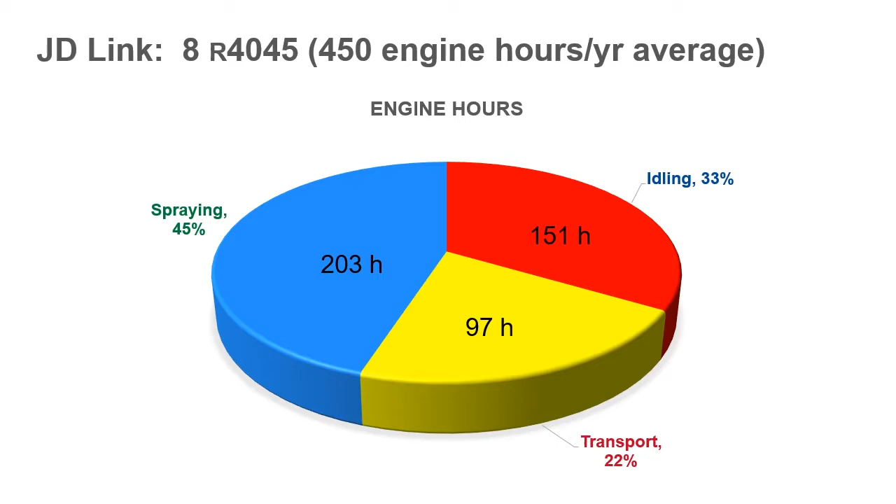This is a loss. So this is not just the ability to get the work done on time. It's also a loss in terms of yield. If you are not able to do that field before the rain, that's yield loss. So it's again a question of timeliness.

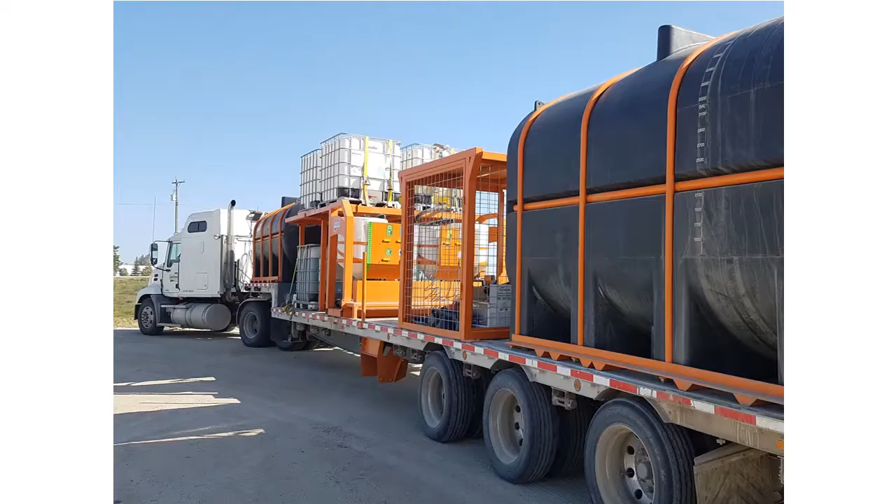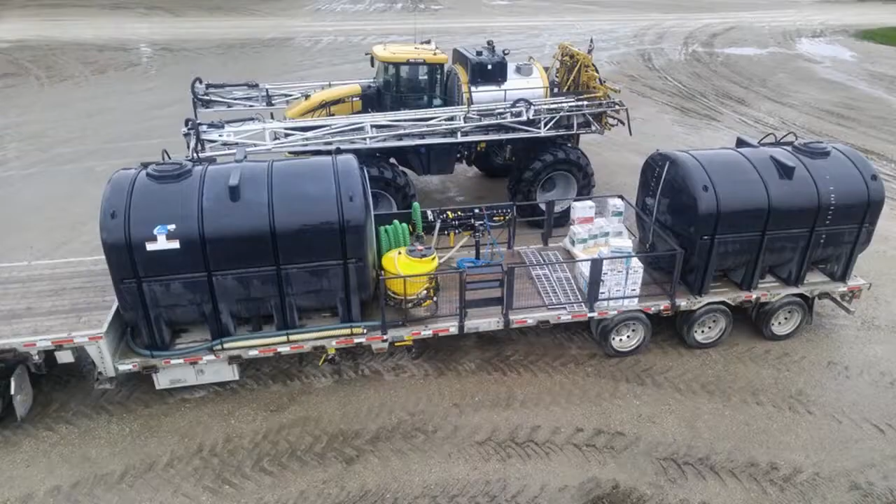So what's really hot and has been for some time is smart tender systems, and we're seeing continued evolution of those. And one new one that came on the scene in southern Manitoba is the Dash system, the fiber Dash. This is a farmer-owned company, designed by farmers and tested on their farm. They've brought some great innovation to it, and each of them has their own approach. Just a few of the things that we're looking for in a good tender system is, of course, capacity. Some people have a hot mix capacity as well, and I'm not sure if this one does, but we are looking for these kinds of things.

The tanks should be black so that they don't get algal growth. A 3-inch pump is essential. There's even some people moving to bigger pumps. Certainly filling these tanks, I've seen 5-inch pumps. These are 1,000-gallon-a-minute pumps. And why? Because filling 5,000 gallons of water takes maybe an hour or two, right? It could take a long time. So you are basically minimizing that downtime.

Hose reel, the hoses get heavy if you can't suck them empty or blow them out. An inductor: basically, most of my customers have gone away from product pumps to inductors because of the speed.

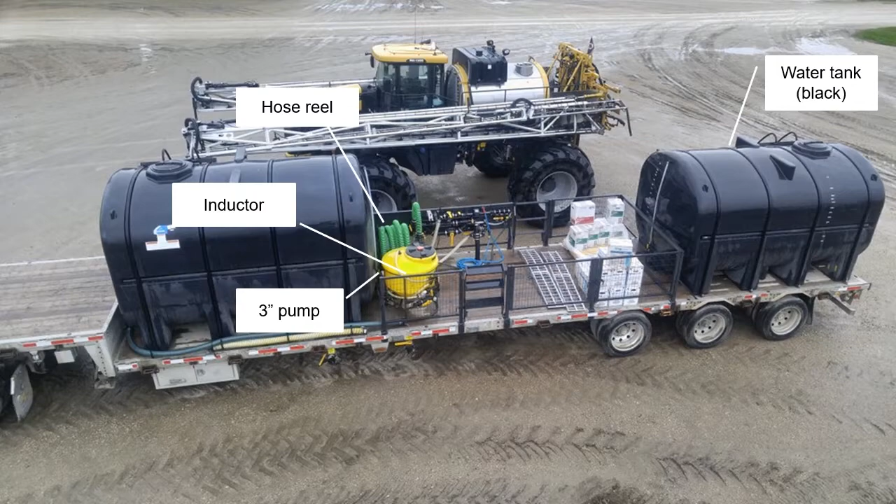Now, product pumps are catching back up. We're seeing some pneumatic pumps that are doing 20, 30 gallons a minute. That's important, and I think that'll help. But if you're sucking from a tote on a cold day, you can't afford to wait 25 minutes for that product to get into your tank. So inductors solve that problem.

We're seeing manifolds, so drawing from different totes, doing your tank mix is nice just with a toggle of a switch. Those are the basic things we see. And this one, we see the cage. So you put your empties in there, they won't blow away, all kinds of things. You've got some ramps here for the quad, all kinds of cool stuff.

I've seen some that are doing a B train on the end here. So they're actually able to unhitch their inductor setup, or perhaps even come back with a tote from the rear. Oftentimes they're side loaded. Sometimes you don't have the room. So coming at it from that other side is a cool thing.

This is Doug Applegate. I just wanted to give him a shout out. So Doug and I talk frequently. He has a system called the MixMate. His company's called Praxidin. So he's a thinker. He's innovative. He's got some very thoughtful flow meters, and he's even got a load cell on his inductor here. So, automatic record keeping. So there's continued evolution here.

What we're trying to achieve is a safe mix that doesn't gum up in the tank, complete dissolution, and also you want to be able to do it in less than 10 minutes, if at all possible. So a hot mix might only take 4 minutes to pump over, and that's what we're trying to achieve. When you're filling every 25 minutes, in some cases, it depends on the size of the tank and so on, that is a big deal. So your mixing time.

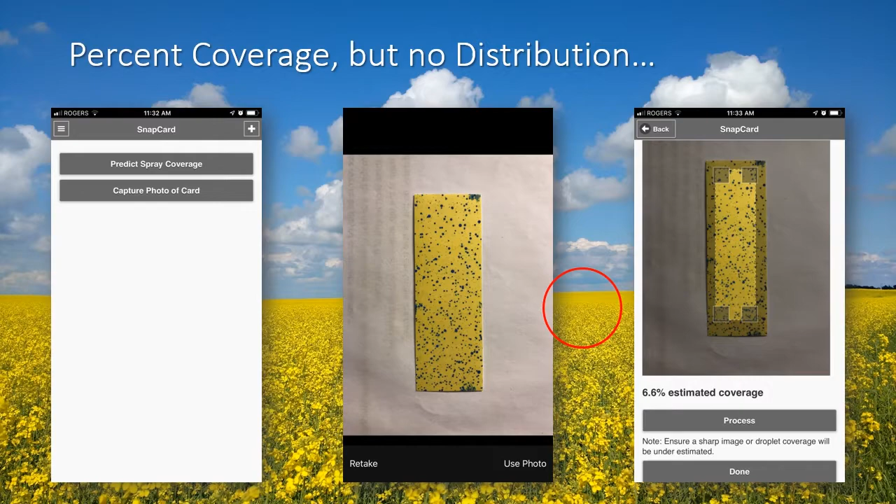You get these apps now. This app that we use is called SnapCard. It's from Australia. Basically, what you're doing is you're taking a picture of the exposed water-sensitive paper. On the right here, you got these handles you can drag to the region of interest, and it tells you at the bottom right away. It tells you coverage. It doesn't tell you droplet size, but it gives you a hard number, and you're integrating that with your own visual observations and your experience.

Another one that gives you more numbers, if you're more into the research side of it and you want some more information, is something called DropScope. We got this one from Brazil. It plugs into a USB port of a laptop. Since we bought it, they've come up with a Bluetooth version, so all you need is a smartphone. But it's a very high-res scanner, so it actually is designed to fit these water-sensitive papers directly into the scanner, and it gives you terrific output.

So if you're a numbers nerd like I am, you get distributions of diameters and volume and quantity. You get all kinds of hard numbers in terms of number of drops, the variability. It does some volume median diameter work, and so on and so forth. It writes reports for you. It's a very, very cool piece of hardware and software.

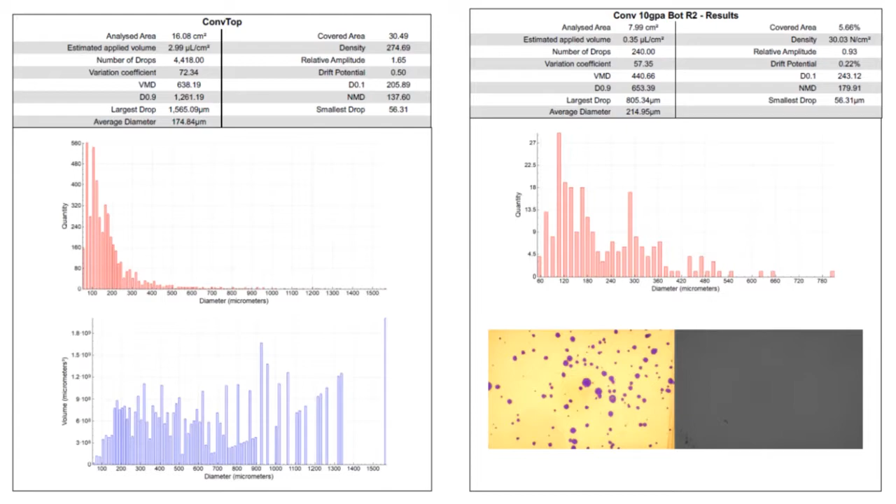So if you're repping a company and you're doing some low drift work and you want to just document where the spray goes in the canopy, these two tools are my recommendation for making that powerful. And then you can actually do statistics on it. And rather than saying, which one do you think is better? You can actually say, well, this one's 25% better.

They now have the fourth generation. We'll show a picture of it in a second. Basically, what this is, it's a sensor that finds a green plant that does photosynthesis on a non-green background on bare soil. So it's a pre-seed burn-off, post-harvest kind of a thing. And basically, it's able to see weeds as small as these little fellas here, this little redroot pigweed.

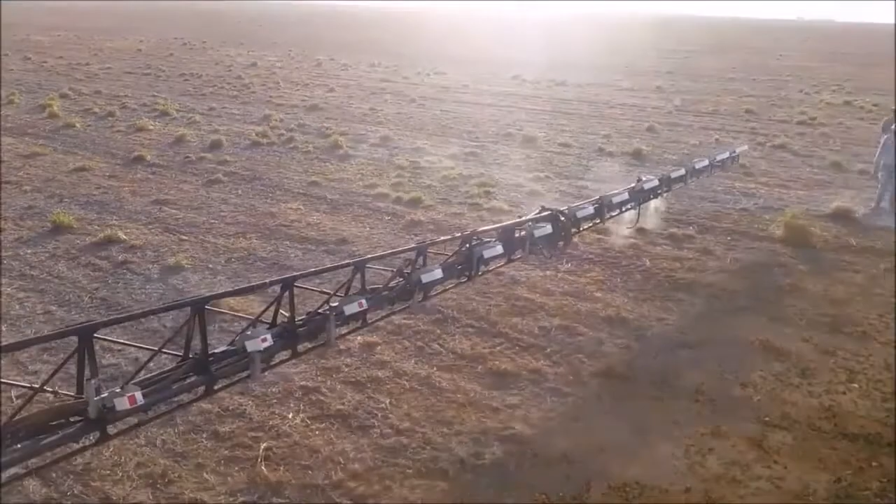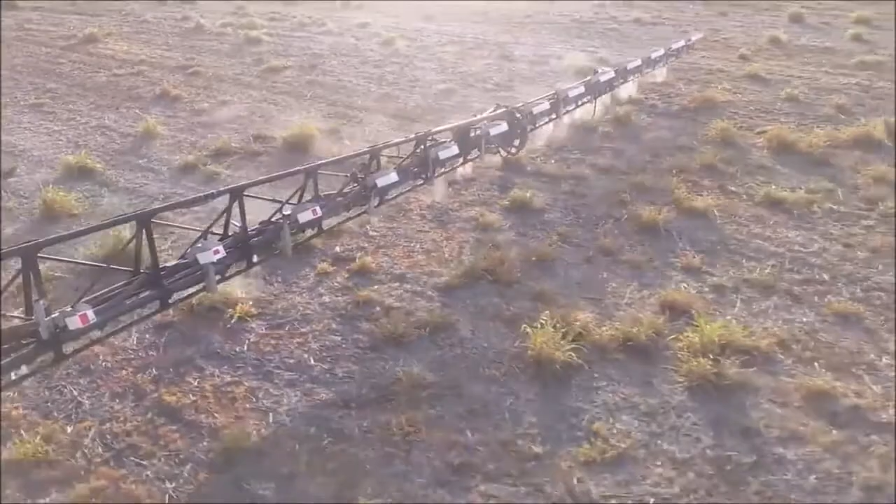And we just use paper to see, did the nozzle go on? Did that thing get sprayed? And the answer is absolutely. Here's a little video. It's a bit of a compilation of a couple of videos I caught on the web that I thought were the best at doing it. This thing will go up to 12 miles an hour. Sometimes people have used it at 15 miles an hour. It senses the plant and basically activates the nozzles that are just there.

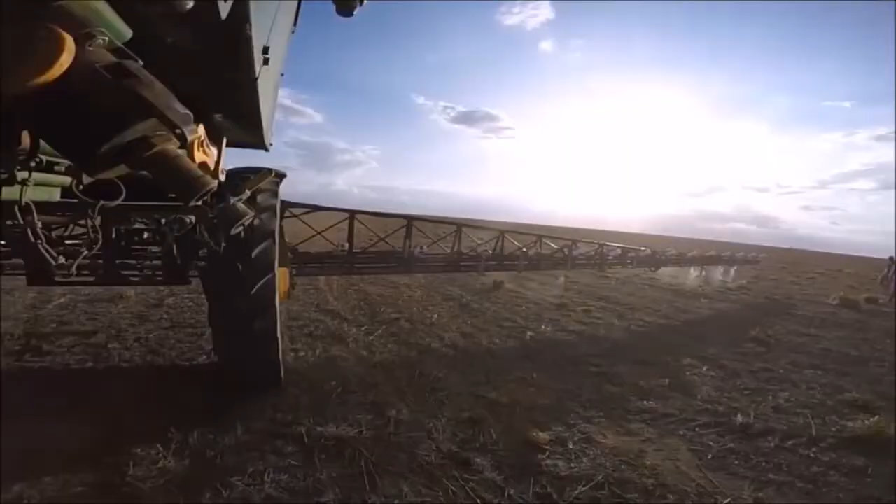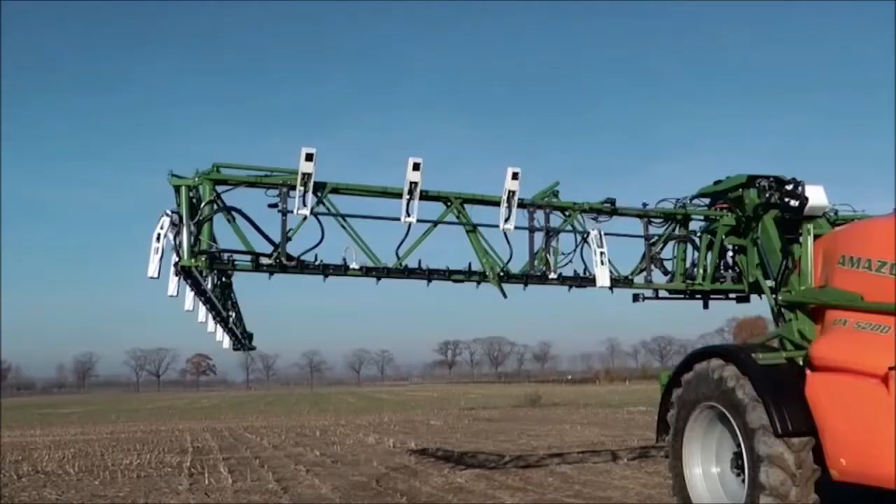The older version had the red light. The new ones have a blue light. It's a lower power consuming light. These sensors are spaced at 1 meter, 40-inch spacing, and they activate 4 nozzles. So it's a high-res thing. The nozzles, as you see, have narrow angles here. They're also pulse width modulated. We talked about that at the last talk. If you weren't there, that means that the flow rate is adjusted for travel speed with a little pulse.

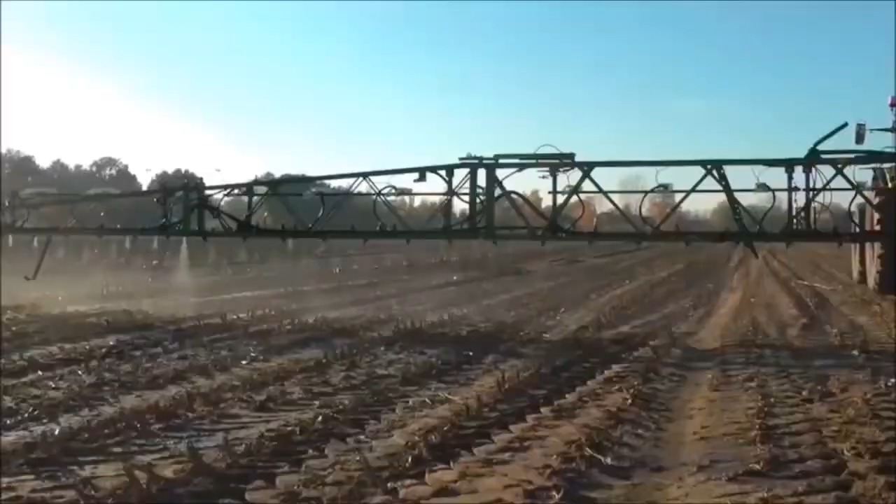So this is the new generation here. This is a picture or video from Europe. They're going pretty slow, but the visual is pretty strong. It only sprays the weeds. What are you getting? A lot of savings. I wanted to show you this one because you can tell every nozzle's on, but you still get the spot spray.

It has something called a background mode, I think it's called dual mode actually, where if your weeds are so small that you're afraid the sensors can't pick them up, and there is a threshold limit, it's maybe a thumb size or something. If they're smaller than that and you need to get them, you can turn the entire boom on, but because it has a pulse width modulated nozzle valve, it will allow you to select the actual rate that you want to apply.

If you got a tank and you got the full quart of product in that per acre, you might think that the tiniest weeds will die with, say, a quarter of that, because they're the smallest weeds. They don't need the full dose. So you can put your whole boom on at quarter label, and then when a bigger weed comes on that won't die with a quarter label, it still is sensed by the sensor, and the whole spray comes on at that nozzle. So in our experience, these things are saving somewhere between 50 and 75% of the spray on a burn-off. And we're going to get back to what that really means.

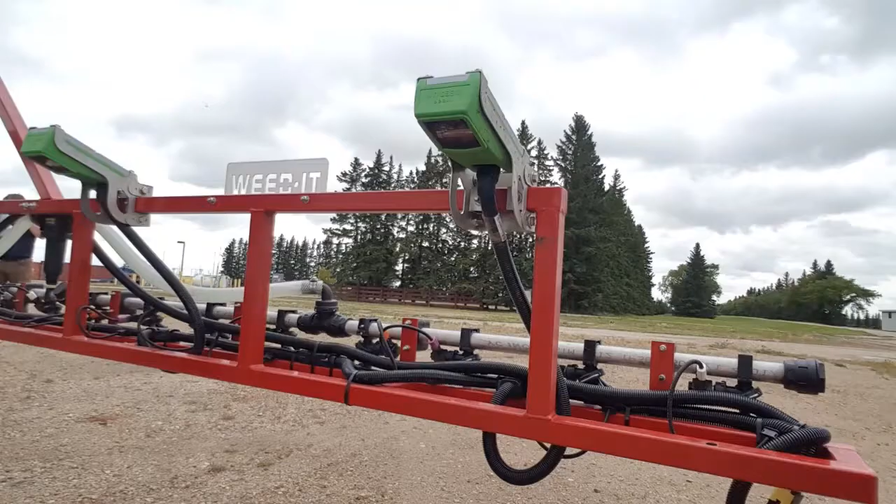The new Quadro has a green housing with a blue light. It's a little bit more compact. It's more power efficient, and they now go on a 10-inch spacing. So you get 4 channels per sensor. So you can go on a 10-inch or a 20-inch boom setup. All you need is the extra nozzle location in there, and that is part of the kit. Nice thing about the Quadro is that it is also, when not sensing, a full-blown pulse width modulated boom. So turn compensation, rate adjustments for travel speed without change of pressure. So a very sweet setup.

I wanted to just maybe take a step back. There are some competitors to this. We do need to mention them. Trimble has a system that you probably have heard of. It's called the GreenSeeker. Well, it started off its life as the WeedSeeker, and it's the same NDVI technology, and they've had a second generation of product. It is slightly less sophisticated than this one.

It's slightly less fast. It doesn't have multiple channels, so you need one sensor for every nozzle. So the really high resolution isn't possible. The high savings aren't possible, those kinds of things. And it's also not pulse width modulated. And the other ones that are around the corner are really just regular camera systems.

And they basically use just an RGB camera, and they say this is a weed because it's green, and this is not a weed because it's not green. They don't have a fancy sensor. So they're able to do that. They might be even using shape recognition to validate the identification. We're going to get into the green on green version of that technology a little bit later on.

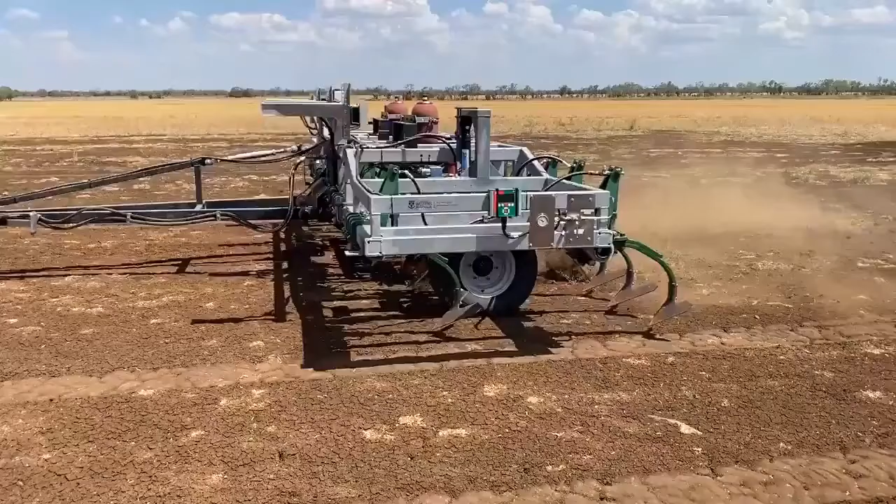What's cool about this whole technology is that it gives rise to new ideas. This is Andrew Guzzomi, and he is a scientist at the University of Western Australia in Australia near Perth. And he's developed this thing called the weed chipper. What he found was the WeedIt sensor and said, I don't know, maybe we can do something with it. What do we got here?

We have a spot cultivator. So the shanks are up. They're spring loaded though. Whenever it sees a weed, it hoes it out. So that's a good tool for us on the arid Great Plains of North America, where we're trying to reduce tillage, but sometimes you still need it. And you can do basically spot tillage. So I love this. I think this is a great little innovation, and who knows what else is coming down that pipe. So that's green on brown sensing.

It's available. It's on the market. The technology is called Weedit. It's available in Montana. It's expensive, but before we get out of it, I just want to make this one comment. We're not going to talk about herbicide resistance except now. Herbicide resistance is an ever-present threat. We've got kochia in Montana. We got other weeds on the way. I hope not soon, but that corner of the world is one of the last places where we don't have Palmer amaranth yet and those kinds of weeds.

In order to delay the onset of resistance, the most powerful herbicidal strategy is multiple effective modes of action. And what that really means is tank mixing, so that you have more than just the group 9 that kills your burn off, but also maybe a group 6 or a group 14 or a group 15, the FMC new farm products that are out there. Other modes of action are specifically designed for that burn off that is effective on the weeds you're trying to control and will kill the resistant biotypes. That is expensive. And saving 75% of your spray makes it affordable.

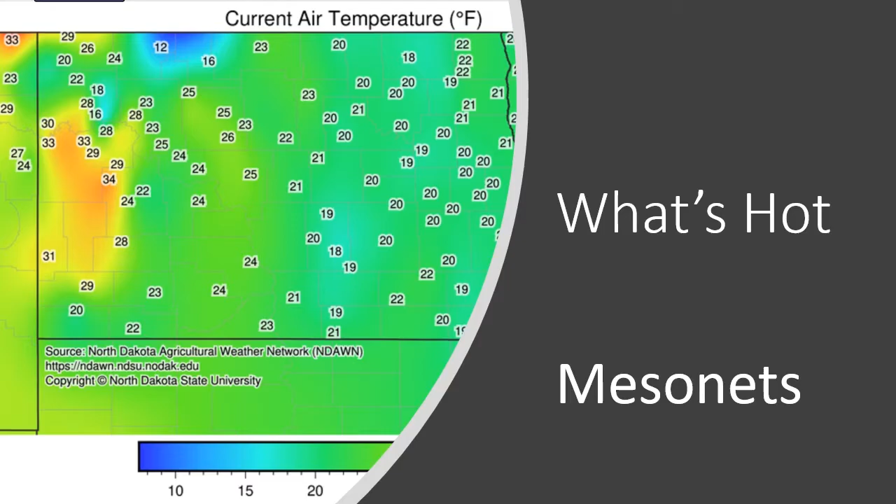And this just gives you better ability to monitor the weather conditions at the locations. It might be a very good tool for scheduling spray systems and so on. This is also available through Farmers Edge. It's available through Climate FieldView, where we're putting these weather stations. And just to give you one example, this one happens to be from Melfort, where we've got some inversion stuff.

I wasn't able to do the screenshot in time here for the NDAWN, but it gives you upper and lower temperature, and it tells you the inversion potential is very low. But if you have a different kind of temperature situation here, much greater difference, a much colder lower temperature, you have a high inversion potential. And that might tell you, I'm going to have to wait an hour before I spray. I'm going to have the sun come out and be sure that we have good conditions for that spray to not go awry.

So fully supportive of these mesonets, very, very powerful tool. What's hot are stable booms. And this is a bit of a bee in my bonnet, as I said an hour ago. I wish that for the $500,000 that a sprayer costs, we can get a boom that is consistently 20 inches above the target over our terrain at our travel speeds. And that would help a lot with uniformity. That would help a lot with drift. It would simply be a very useful innovation.

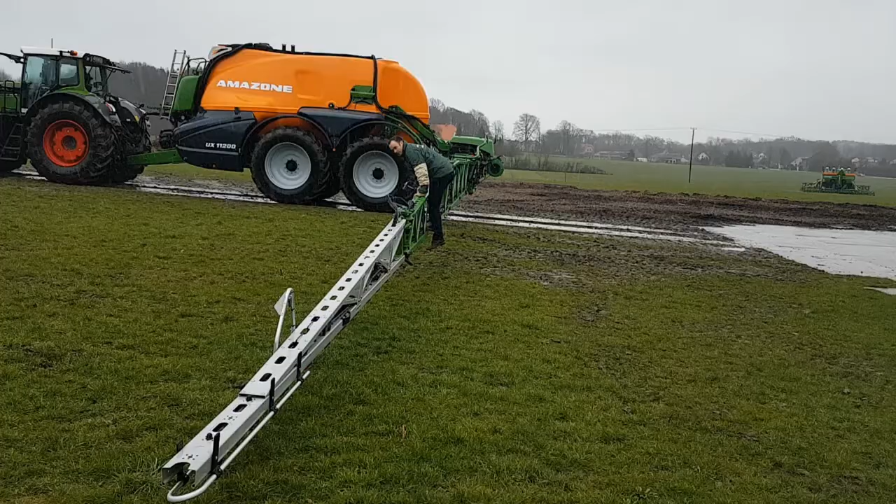A couple of years ago, I went to Germany, and this is the Amazone, and this is Timo here in the middle here, and he just jumped on the boom, on the bumpy track, and the boom said, "I don't care." And they actually drove, and he just held on, and they went over the bumpy track together. And the boom said, "I don't care that there's a guy on the left side. I'm going to be okay with it."

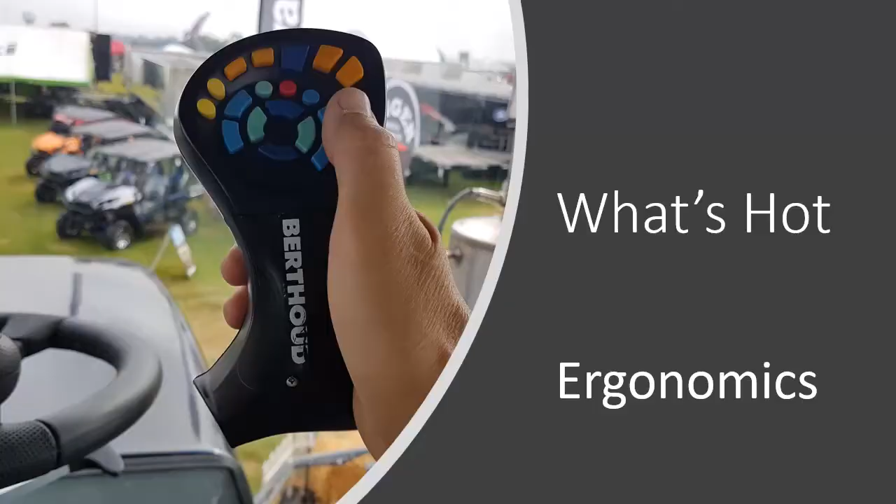But I think what that really means is we're going to continue to see European sprayers like the Agrifac and others coming in and basically taking that niche and saying, we can do this. And with the sprayers being as expensive as they are, any additional feature that you can get, I think will have some value.

Here's another European innovation. This is a joystick. I'm holding it. I ripped it out of the cab. Basically, it becomes a remote control, and you can take it to the boom. You can change your spray pressure. You can turn your boom sections on and off. What a great idea. I mean, I wouldn't own a sprayer without a remote control sectional controller for priming, for flushing, for checking. It's just an essential tool. These guys are building it in, and they're saying, we got you covered. So that's an absolutely essential piece of equipment for me. So this is just one example of a company doing it, but of course the aftermarket ones are for now absolutely indispensable.

What's not hot, I'm just going to maybe give you 2 examples of what I think is not hot. What's not hot is monitors that you have to have a half-hour tutorial on before you can spray. I'm not picking on anyone. Everyone's equally to blame. I sometimes say the golden age of the monitor was when we had toggle switches for power, pump, sectional control, and pressure up and pressure down. And that did the job.

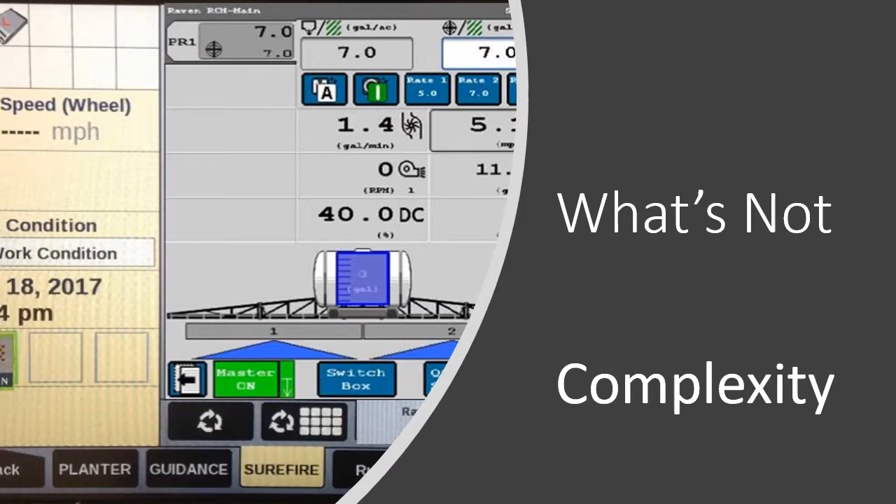They're not yet legal everywhere. They're not legal anywhere in Canada, but some states have allowed them to be legal. The EPA is still on the fence. They have allowed states to give permission to use them. But we really need registrants to come on stream as well and make sure that their products are going to be legally applied by drone, because there is an issue with spray drift. But there's a rapid evolution.

You got high payload. So these are the kinds of drones that you can no longer just buy off the shelf and fly yourself, because they need an advanced drone operator license. In Canada and the US, the 25 kilo weight limit, below that, you can get a basic license. I've got it. It wasn't that hard to get, and you can do whatever you need to do with it. But these heavier drones require advanced license, special flight certificates.

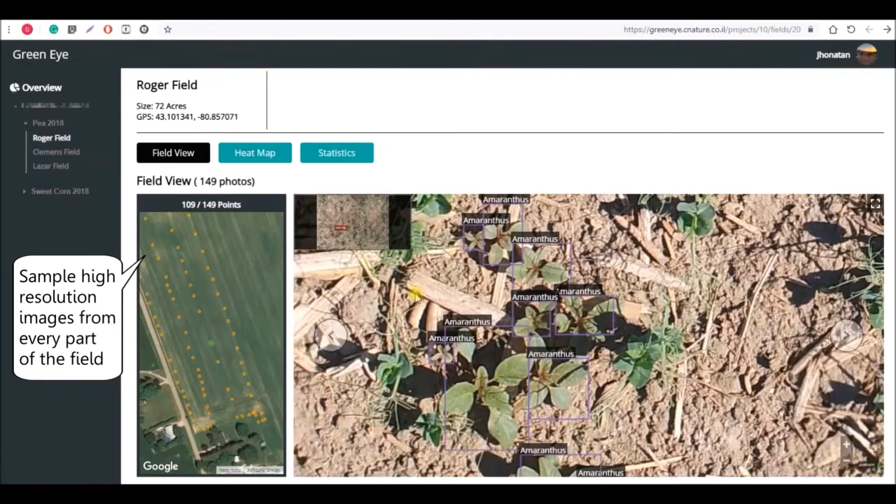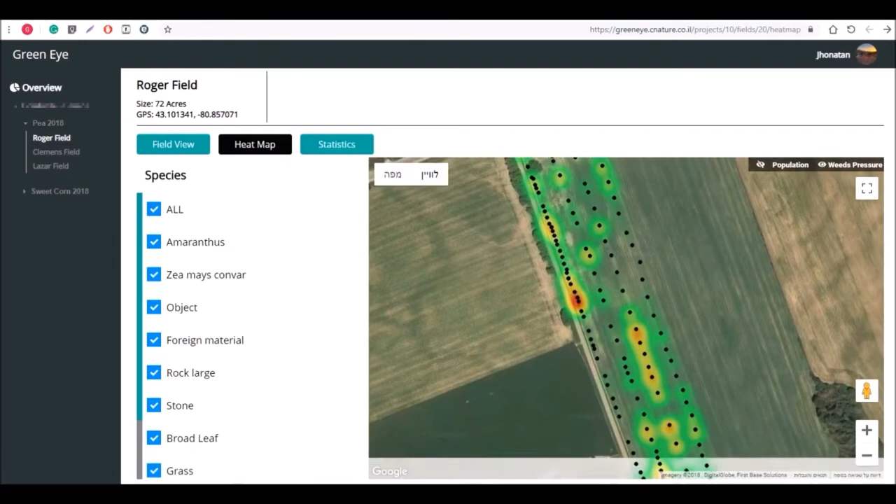This is a company called Green Eye, and they basically fly low drones over the field. They don't cover the whole field because of the resolution needed. So they'll take a picture that gives you sub-millimeter pixels. And then what they can do is they can basically tell you where the species are. So they're saying amaranthus, that's pigweed. They're saying that's the heat map for it.

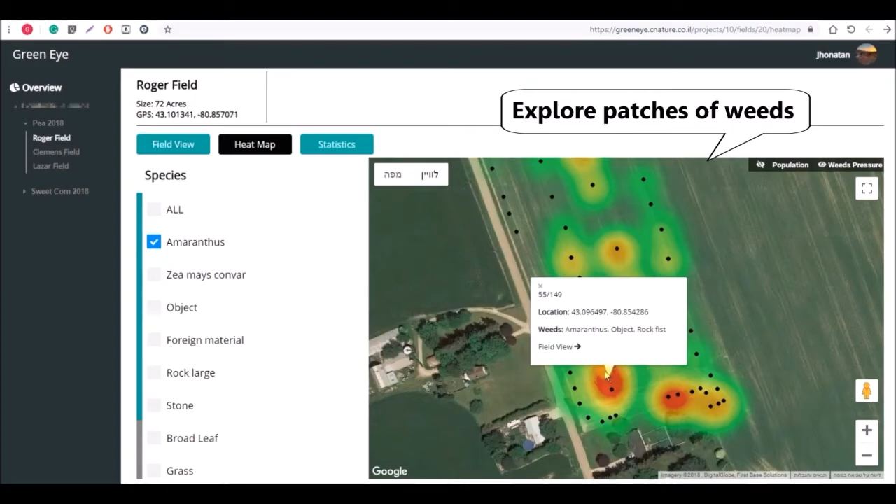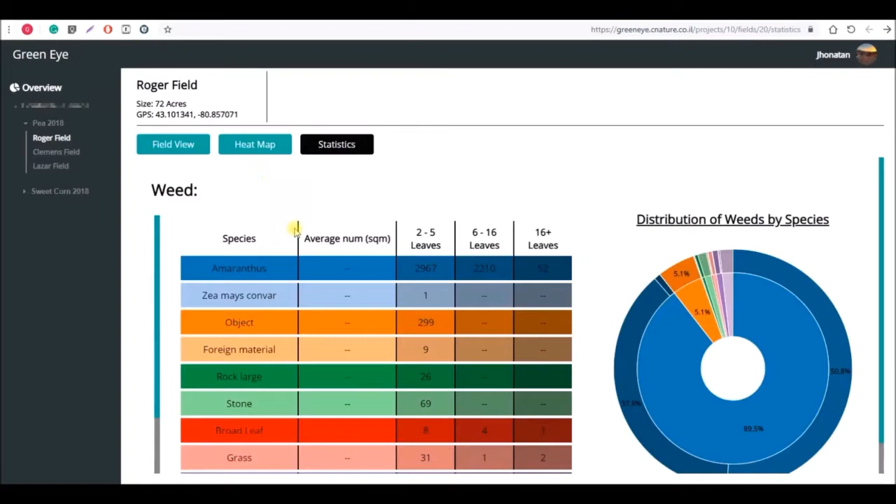And they're going there and they're saying, okay, it's pretty hot here. What do we got? That's the field. Oh yeah, that's what it looks like. And they've identified every plant by species. They even identify rocks. Then what they do is they basically will give you a pie chart, a table. They'll tell you small leaves, large leaves, and they'll give you the distribution.

This is like now you have a map of your field. Where are your weeds and how big are they? Even just for scouting, that's powerful. And maybe monitoring the effectiveness of your herbicide program, taking note of areas where resistance might be emerging because you haven't got effectiveness, and being able to do a ground truthing on those.

So that's Green Eye. A company called Taranis is also doing the same thing. They're still struggling with a high res complete field coverage because they do have to fly low and take essentially a sharp picture.

And that's a challenge. But the artificial intelligence is there. And what they're trying to do is develop these sprayers so that we can get cameras on booms, be able to basically speciate every single plant that's on the field, and then say, all right, we're going to spray this one, but not that one. We are at about an 80% success rate, judging by the companies.

Xarvio is leading the field. A few others are in the game. Carbon Bee and Bilberry are doing it in France and Australia, respectively. Both of those are French companies. And we're starting to see that kind of technology. So the future is bright. Blue River, of course, is one from California. We're initially going to see this roll out in the row crop world. So it's a little bit more of an eastern Great Plains, southern area, not so much in Montana where row crops are a little bit more scarce.

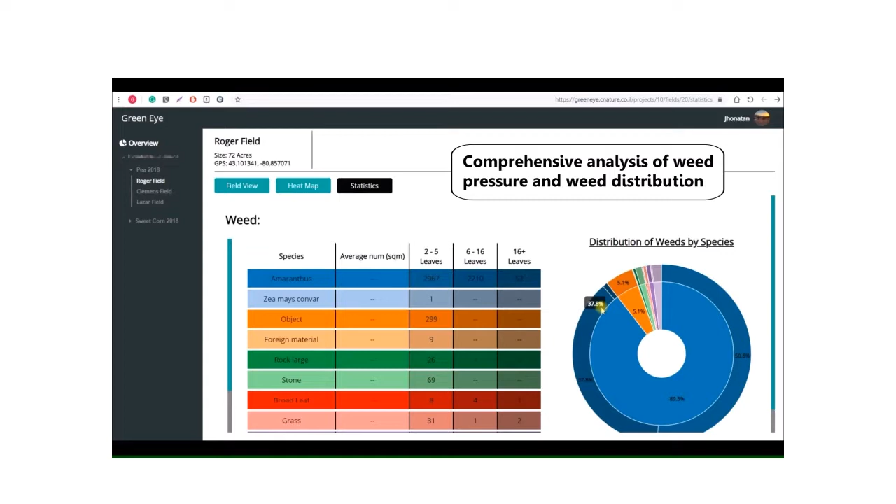Big challenge, but I think their threshold for making this work is about the kind of performance we want from herbicides. We're expecting a 95% success rate with herbicides. Otherwise, we may need to spray again, depending on the weed density. Well, this technology is going to have to be at the same level. Here's just one example of what they're doing, driving with the video camera and saying, yeah, that's live. So they're saying, yeah, we got stuff. This is what it is, and we're going to spray it.

So very, very cool. We're going to change gear now and just talk about a little analysis we did recently, and then we're going to focus on 4 solutions to the problems we're going to find. And that's how we'll finish off. We still got a good 20 minutes or so to go here, but this is the change of pace. What I want to show you now is basically a chart here that talks about where the spray goes.

And I'm going to give you some scenarios that you might not necessarily agree with, but they are a baseline, okay? My first baseline is our field is 160 acres. What that means is this is a unique herbicide on those 160 acres, okay? We're coming in with a cleaned out sprayer, and we're going to clean it when we're done, okay? We're doing 10 gallons. We got a 1,200 gallon tank. We got a 120 foot boom. Where does the spray go? So the total volume we need is 1,600. That's 160 times 10.

But first thing we do is we have to prime the boom. So we have to fill the boom with about 30 to 40 or even more gallons of liquid to get all the hoses full of spray. And while we prime, we spray. And depending on how experienced the operator is and what features the sprayer has, some of that product will spray onto the ground. That's why we prime at the edge of the field, boom hanging over maybe a grassy area or something. And we accept the fact that some gallons are going to hit the ground here. How many? Each individual has their own number.

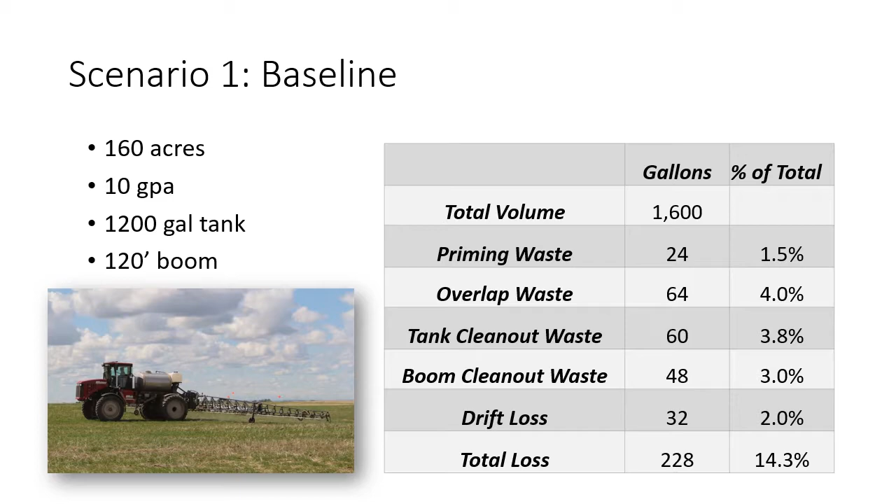This is admittedly a worst case. We're talking about putting 228 gallons onto the ground, basically, or losing it. And we're essentially going to put not 1,600 gallons in that tank, but maybe 1,750. And that's 14% waste. So what can we do here?

Let's do one more scenario. Let's go to the burn off, the 5 gallon. So the numbers are essentially the same, okay? Our priming waste is still the same number of gallons, but because the concentration is much higher, it represents a higher percent. Overlap's the same, but again, tank and boom clean out are much more harmful because they represent a more concentrated solution. And basically, we're losing less gallons, but they're more valuable, and that's a 20% and change loss.

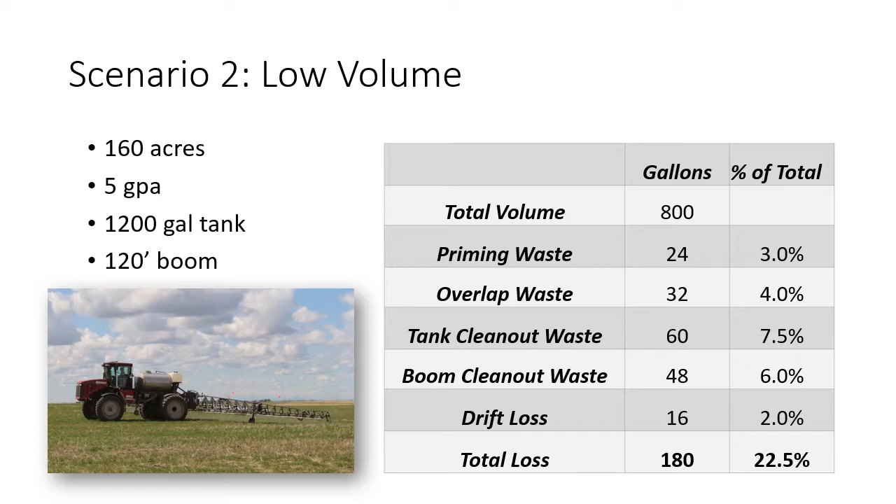Okay. Now let's implement some good technology. We're back to the quarter with 10 gallons, 1,600 gallons. We're going to put a recirculating boom on here that offers no priming waste. We're going to put individual nozzle sectional control on that reduces overlap waste to 1%. We're going to have a better tank. We're going to have more accurate volume measurements and a better sump in that tank.

Boom cleanout waste is still the same because it has to leave the boom and go onto the ground. We're going to put a low drift nozzle on, and our total loss is 92 gallons, only 6% from 15. Okay, so that's what ultimately we'll have to do. Now, I accept that doing it on the quarter is maybe not that accurate.

Let's say you can do 1,000 acres between cleanouts. And let's say you've got the good plumbing that we talked about. So you're doing 10,000 gallons. You're not losing anything to the prime because you've got a recirculating boom. You've got overlap waste of 1%. You've got individual nozzle sections. You've got tank cleanout waste, 12 gallons, so very, very little.

You still have the boom cleanout. That stuff still has to get pushed out. You've got to get rid of it, so that's gone. You've got a low drift nozzle, and you can reduce your total loss to 2.6%. That's from 14.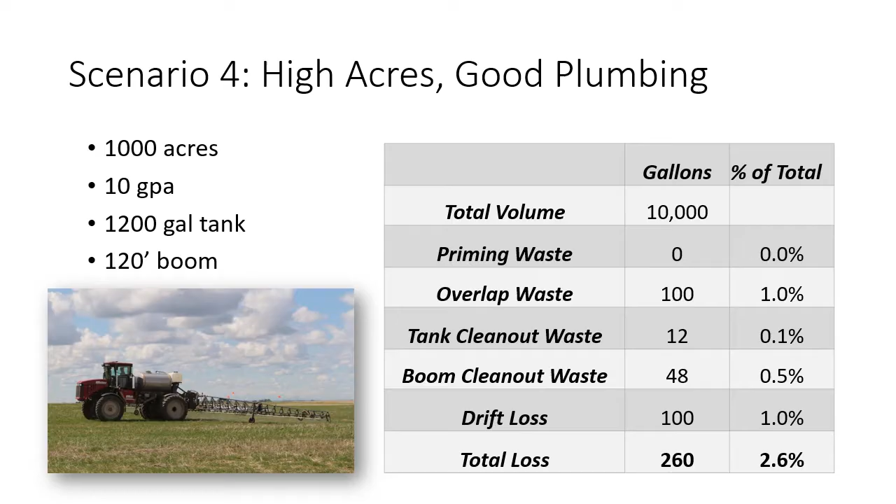So now I've identified a few technologies that I now want to highlight. And I've mentioned the recirculating boom. Okay, what is it? A telltale sign is rather than have a boom end here, the end is open and goes back to the tank. For those of you not familiar with plumbing, basically a conventional sprayer is plumbed the following way: you have a tank and a pump.

The pump pressurizes the liquid. There's some bypass for pressure control, but it pushes it basically to the boom sections. And these sections are maybe 10 foot in length. And these are your sectional controls. So you can individually turn these on or off depending on what you need, but they have boom ends.

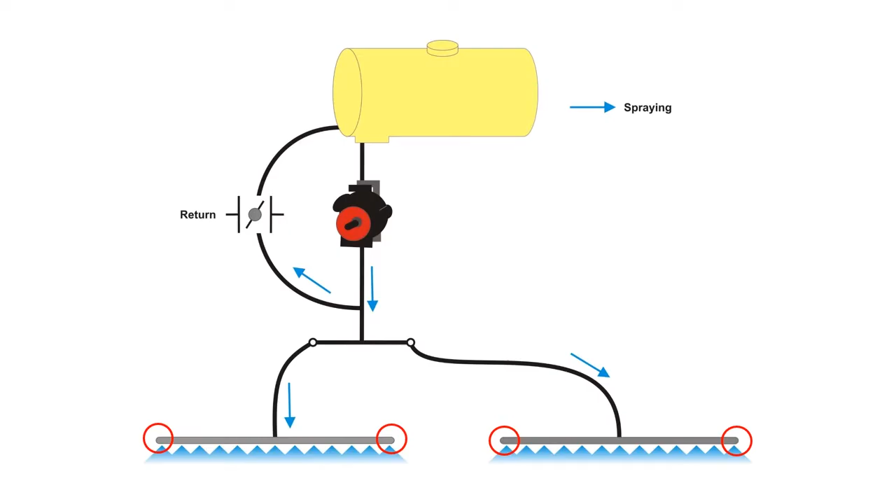So at the end here, you get a very slow migration of material. You might have a dead space here. You might have sedimentation of dry material. You have a problem area. It looks like this. So here's your boom end. This area doesn't get flushed out easily.

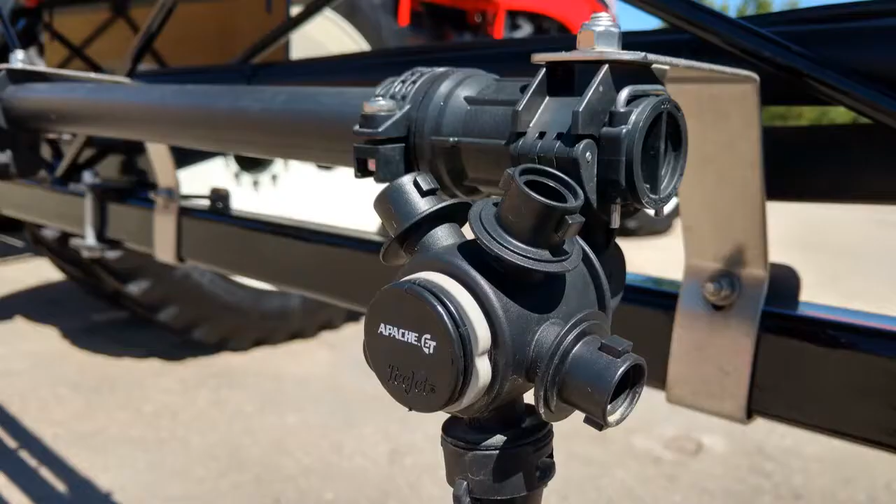So you have to remove this cap, and some people put elbows and banjos on here to do that. It's a little bit of a messy operation. You can get these Hypro Express nozzle body end caps, which have been a great innovation for that.

John Deere also has those. But they've even found with those that they actually do have some settling. So they actually then developed an add-on that lets you drain them temporarily. So even that wasn't done away with. So it's a bit of a pain.

A recirculating boom addresses this issue by having the same tank and pump, but now pushing the liquid not to the middle of the section, but to its end, and then flushing it all the way through and then coming back to the tank. Okay, so that is the principle. And the idea is that you get an entire left and entire right section of boom, and the nozzles, the sectional control, are now with individual shutoff valves, just like we would have on a pulse width modulation system.

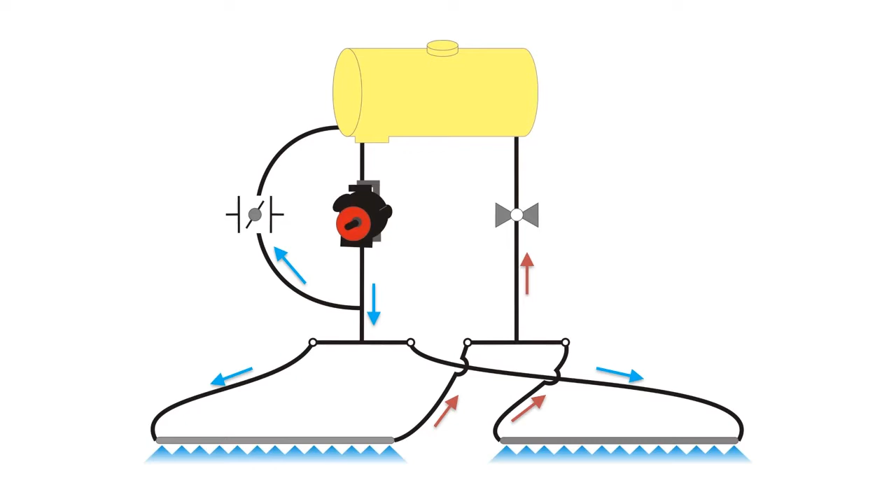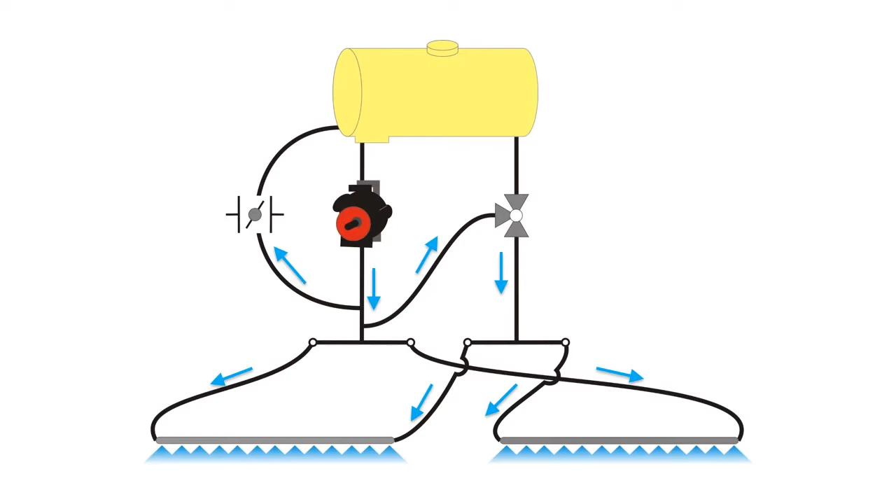Okay, a couple of systems use a three-way valve here, so they can actually choose to push to the end and then bring it back to the tank, or they can open this valve up and push it to the boom both ways. So this makes clean out easier because you can push your pesticide that you have to get rid of onto the field this way, and then only this little section here would go back to the tank, or basically it gets a drain valve and goes on the ground. So that's the principle. Back to pictures.

This is the first commercially available recirculating boom in North America. It's the RoGator Liquid Logic on their C series. Very nicely engineered, quite complex, but it works. Nice sweeps, and it's integrated into their monitor system. So this is an option.

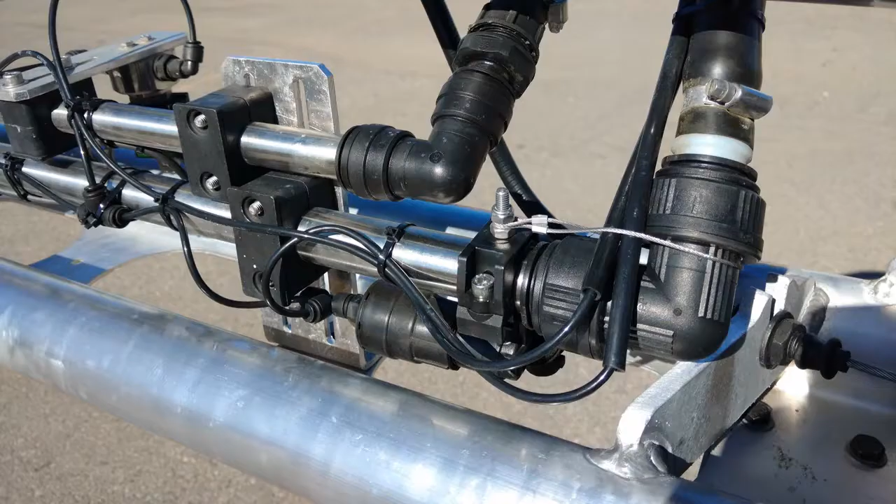This is the Pommier boom. This is the boom that actually brought this technology to North America some 15 years ago. So they will pump the spray using this steel line. This is from the tank, and comes around and goes into the boom, and then goes back towards the tank from here, and then has individual shutoffs. In this case, the shutoffs are air activated, so they're not that expensive.

Aftermarket, this fall, Raven introduced their aftermarket system. It comes with a kit. I'll have to see what it is in US dollars, but let's say around 5,000 is what I've heard. I think it'll be a little bit less than that in some cases.

What they're doing is they're taking individual plumbed sections with their individual sectional valves, and they're actually just stringing them together. They're just saying, we're going to push the liquid to the outside, going to come in here, and then we're going to go to the middle, to the middle, to the middle. This is the center rack here, we're going to push to the middle, go to the outside, and then all of these will ultimately come back to the tank. So it's a retrofit. You don't have to change your booms per se, but you do string the individual sections together. The nice thing about the Raven is it's ISOBUS. So it'll go into your Viper 4 or any other ISOBUS terminal. So that's kind of sweet.

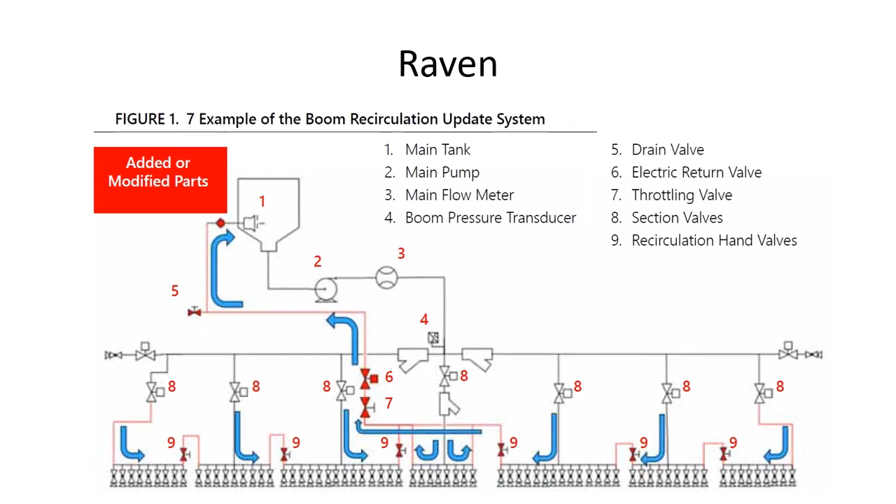We have a little Canadian retailer called Nozzle Ninja, cut his teeth in the sprayer business, and he's working with ARAG Australia, actually. So ARAG's Italian, but they provide actually a lot of behind-the-scenes material for North America, too. They developed a recirculating aftermarket kit. And I just talked to Mike Wengren yesterday about how it's going, and it's selling very well. So it's, again, an aftermarket. It comes with its own monitor. Okay, so now it's not ISOBUS, you're not integrating into something else. You toggle a switch when you want it to recirculate.

So the big advantage here is the following. If you wanted to prime that boom, okay, you would leave all your nozzles off, and you would simply push liquid to the end and all the way through and back to the tank, and you would push the product through. And if there's a plug of water, that would just go back to the tank. No big deal. And then you've not sprayed a gallon and your boom is fully primed and you can go.

Depending on the configuration of the sprayer, if you wanted to flush water through this boom without emptying your tank, say you want to keep going tomorrow, but you got a dry product you want to get rid of in the boom, you can draw water from the washdown tank and push it through the boom and push that plug of dirty material mix back into your solution tank.

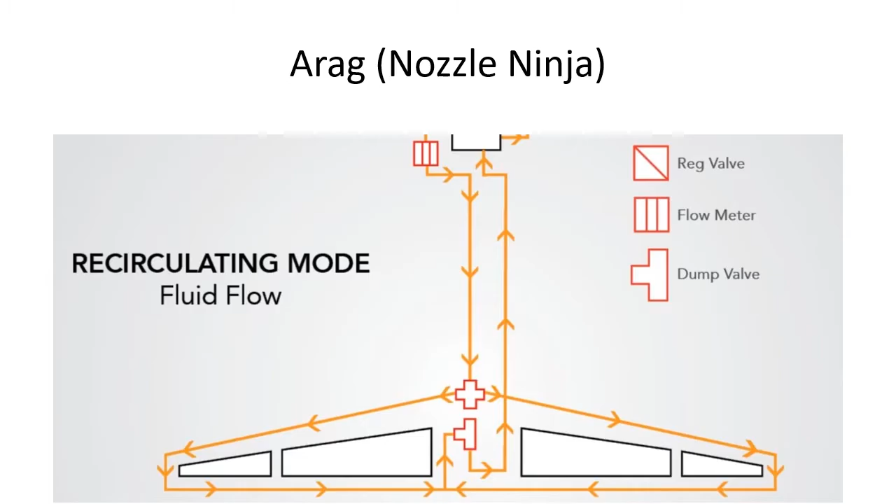And not every sprayer will let you do that, but that's one of the nice features about it. So very sweet. So that's recirculating booms. We've written an article on Sprayers 101 about it if you want to read more.

Continuous clean out. Cleaning out, I always jokingly ask my customers the question, when do you know that you're done cleaning your boom? And the answer is usually in about 2 weeks. Because you never know, because dirty water and clean water look and smell the same. It's a small amount of stuff. And so you're precautionary. It takes a lot of water, it takes a lot of time. Continuous cleanout is a way to make that less time consuming.

And here's how it works. So you will buy a second pump. This pump will be dedicated to the clean water tank. Okay. And when you're spraying and you're spraying your tank empty and the pump sucks air, you will turn this pump on. And it will then introduce clean water into your tank via washdown nozzles, and the sump will fill again. Your solution pump will draw water again, and if you keep this sump volume very low,

it will now, first of all, get rid of that plug of tank mix that will continue to dilute in this system. It's a logarithmic dilution. By the time your clean water tank is empty, if you've done this right and kept the sump low, just starving the solution pump, you will have a system that is made of water.

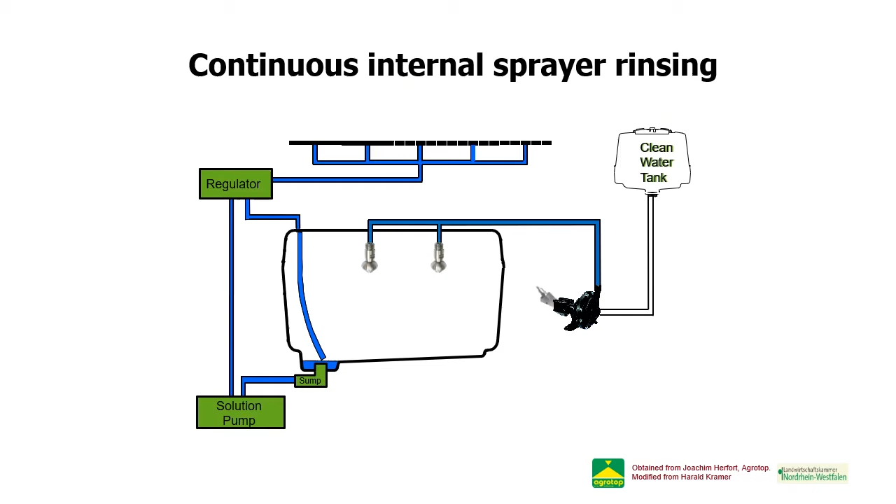How long did that take you? 5 minutes. Did you leave the cab? No. Did you flick any switches? Yes, so you flicked the toggle switch in the cab. You kept on spraying. You're perhaps going over your headlands another time, whatever. That is the deal. Lots of guys are doing this.

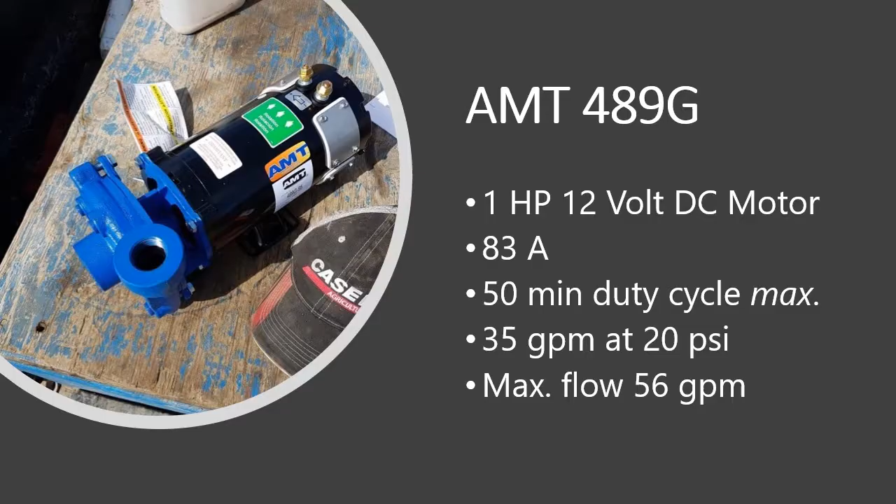So this is one I visited at a John Deere dealer a couple of years back. He showed me his setup on a 4830, very clean. So he's using this pump. It's the AMT pump. It's a 1-horse. It looks like a starter motor. It draws a lot of amps, but it doesn't run very long. The 4830's batteries were able to handle it for the 5 or 10 minutes it runs.

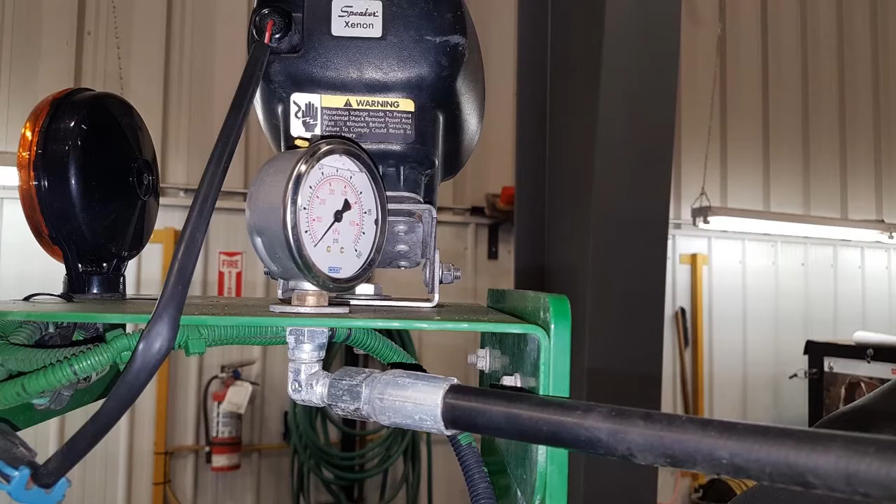It does give you 35 gallons at 20 PSI, which is what you might need to wash that tank down. It does give you a higher flow, but at lower pressures. He put a pressure gauge on it so he knows what it's delivering. Here's his 4830 tank. He's got 2 of these inverted deflection cleaners. He said it's absolutely wet in there. It's just a shower. So he's happy.

Here's what you do. You're basically spraying your tank empty in the field. When you're done, you just keep going until the tank is completely empty. And when your pump sucks air, you flick that switch that turns that blue pump on. And you're delivering to that sump about the same volume as you're currently pumping out, let's say 30 gallons a minute. If you can't deliver 30, you slow down and you only deliver 20 or 15.

It doesn't matter whether you have a good spray pattern. And you will just simply match those 2 flows. And then you will basically clean your tank. You're diluting. You might still need to do extra cleaning, but the biggest work, the one that takes the most volume, the one where you dump material on the ground, that part's done.

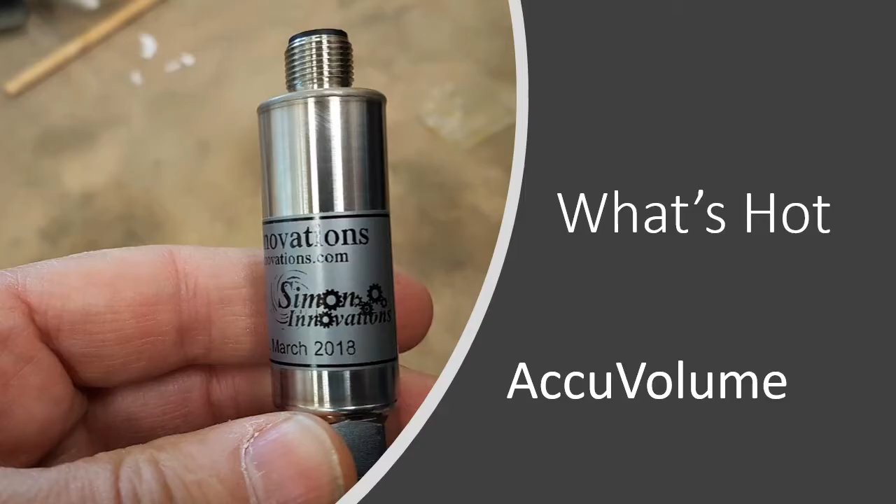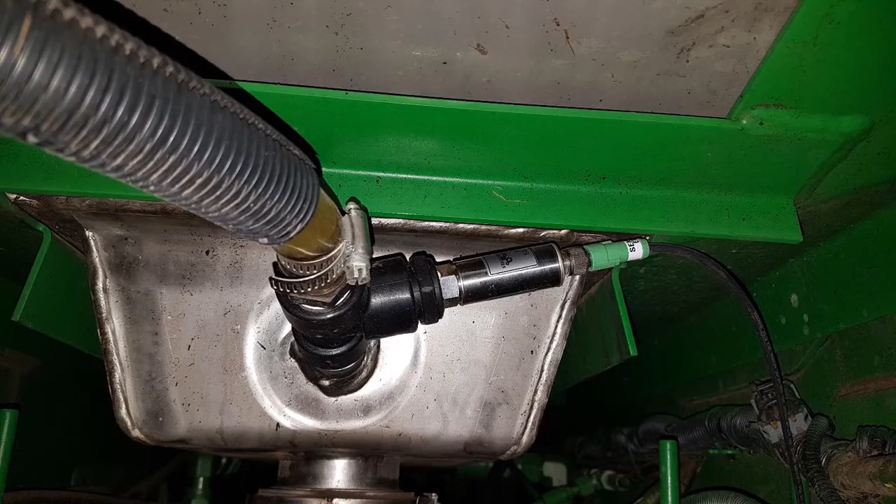Okay. The key to it is the AccuVolume. The AccuVolume is a device exactly as big as I'm holding here in my hand. That is a pressure transducer. This gets plumbed in to the sump and it weighs the material in the tank. It gives you 1 gallon accuracy of your tank contents at any time, any slope position. As long as there's a water column putting pressure on this thing, it'll read gallons.

And you calibrate it once, and then you know whether you have 500 or 50 gallons in your tank. If you have 47 in your tank, you'll know. This is a way now to more accurately fill and empty, make small adjustments to your last pass. If you're not going to be empty when you're done, increase your water volume by a gallon an acre, and make sure you are.

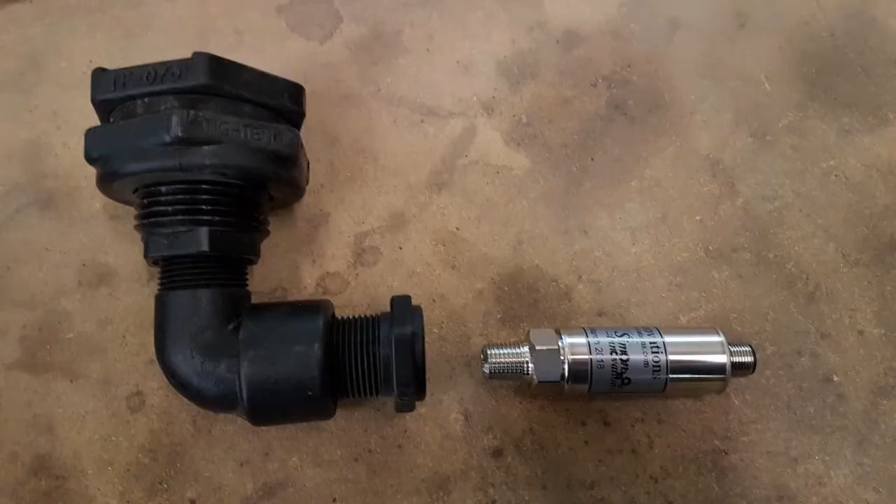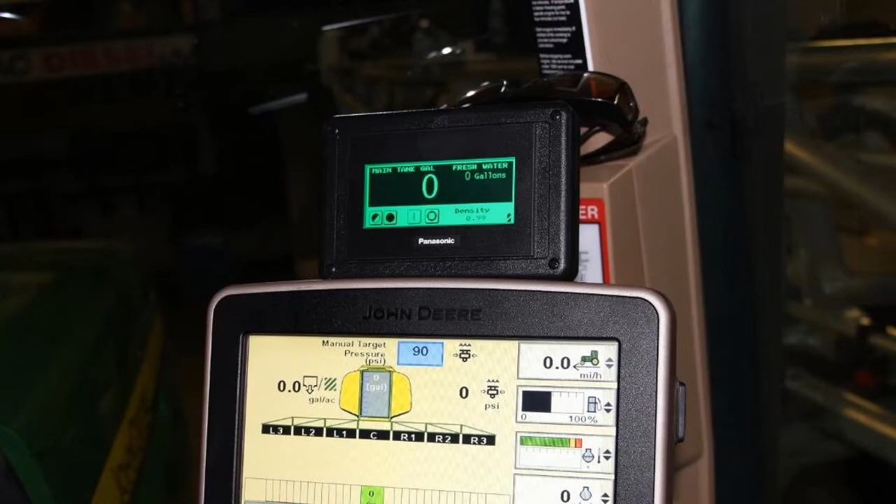How much is that worth? Well, you've got to use it to really appreciate it. These kinds of things are on the website. You recognize some of the graphics. So if you Google continuous rinsing or recirculating boom in the search bar on the top right corner, you'll get articles. There's no advertising on our site.

We talked about PWM this morning. For those of you that are joining us for the first time, pulse width modulation is a system of controlling the flow rate of a nozzle without a change in spray pressure. What it does is it intermittently interrupts the flow to a nozzle, and that interruption is adjustable, and that's called pulse width modulation. It allows you to adjust the pulse width of that interruption. The proportion of time that the nozzle is on is called the duty cycle.

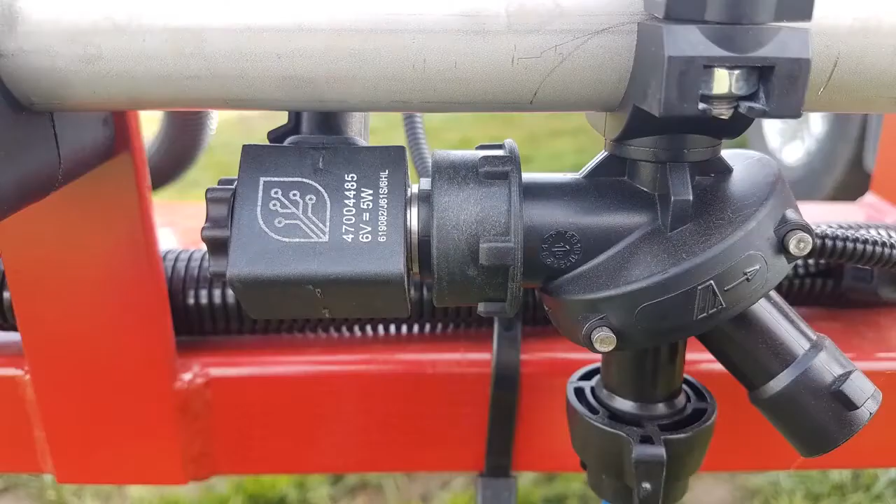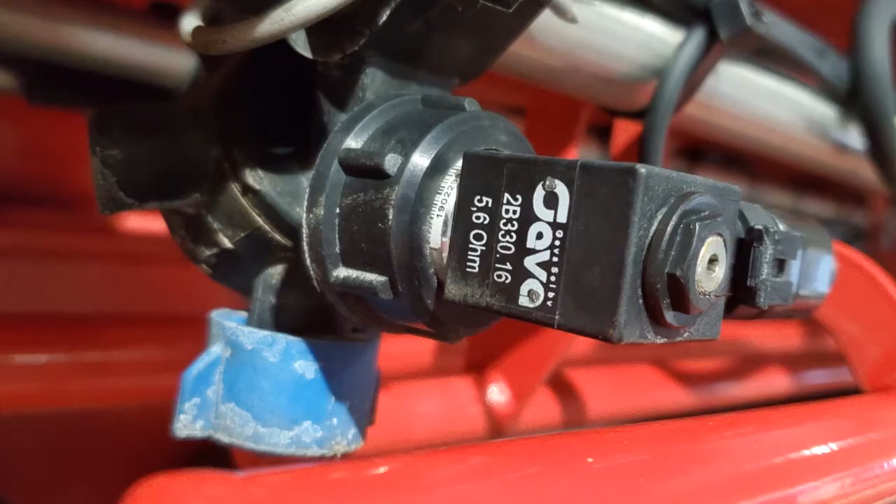Other manufacturers like Greeneye, like Agrifac, are producing these solenoids. They're not difficult. This is the poppet. There's a magnet in here. This thing is spring-loaded. It seals against the flow orifice, and basically it just pulses back and forth. So it takes a few amps to do this, but not a huge deal. Here's the Agrifac one. And what you get with it automatically is sectional control resolution, which is very cool. But you also get the other things we talked about this morning, like turn compensation and so on.

This is going to set you back some coin. These things are coming in at 20 to 40,000, not cheap. But just the sectional control by itself, if you can assume a certain amount of overlap loss on your field, that is something you can very quickly figure out your ROI. Typically, the ROI on sectional control alone is only a few years. And then it gives you the turn comp and some of the other peace of mind features as well. So that is absolutely going to continue to grow.

I talked to John Deere at the last in-person meeting I was at. I asked them how much of your throughput is selling with ExactApply, the John Deere version of it. And they said their estimate right now in Western Canada is 80% of John Deere sprayers are going out the door with ExactApply. Case has been at close to 100% with AIM Command for years. And then almost every manufacturer offers it as an OEM option.

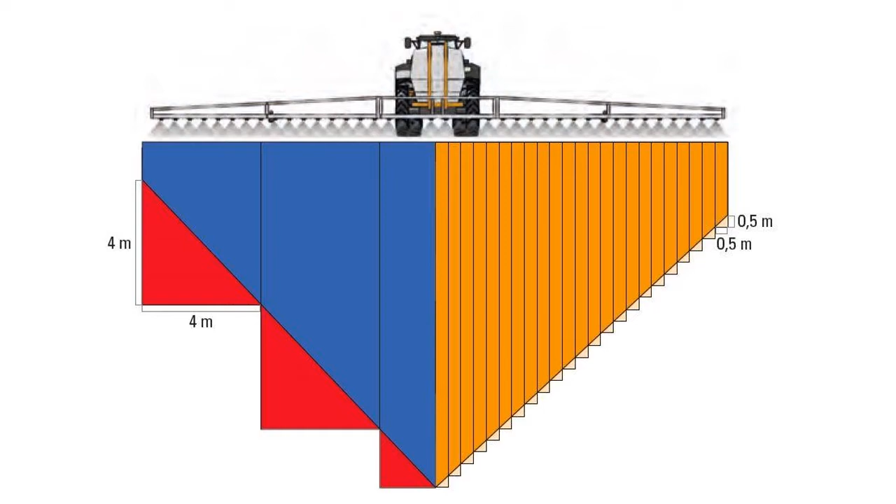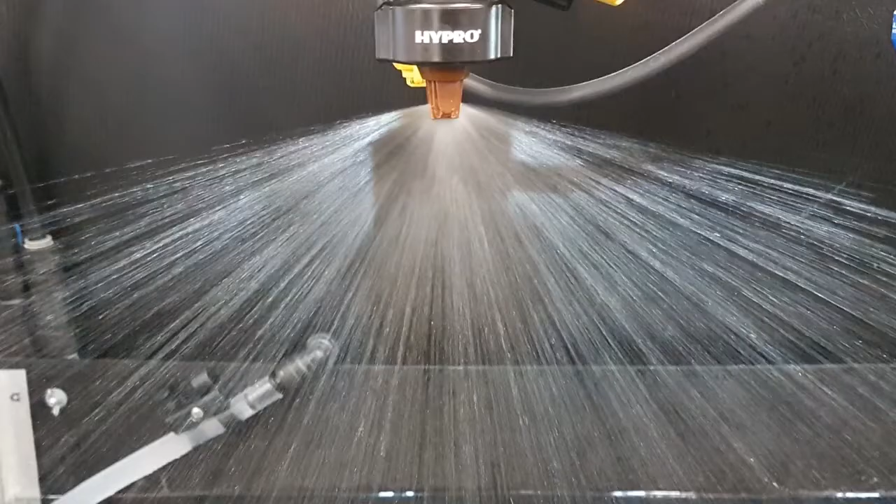Okay, what's hot is dicamba nozzles. Not because they provide great coverage. I mean, let's be honest, they're so coarse that they don't, but because they let you finish the job. So this happens to be a soft drop sold by Greenleaf out of Covington, Louisiana, great company. And this happens to be the Hypro ULDM, a new one that they've made, super wide fan angle, super coarse. These are made for the dicamba market.

I know that dicamba is not a big deal in Montana, and that's not my point. My point is you should have a nozzle like this. Why? Because it'll get you out of a tight spot. When you're 15 miles from home, the weather's turning bad and you've got to finish, but it's getting windy and you're worried about your neighbor, put these nozzles on and finish that job. You can get done, and you might have a coverage loss, you might have an efficacy loss, but it is not going to be very serious. It won't be zero. You might have a 10 or 20% noticeable loss of efficacy, which is still good enough, still better than not spraying it at all.

So I think this kind of a tool needs to be in your quiver. A huge selection of dicamba nozzles. Every nozzle manufacturer that I speak to is making dicamba nozzles and almost nothing else, and it's partly because of that XtendiMax revolution, but also for us, I think.